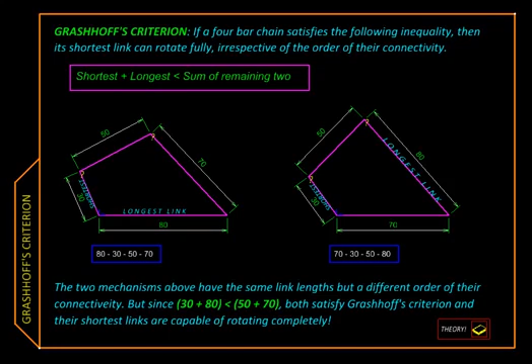Now, why are we so concerned about having a link that completely rotates? Because such a link can then be connected to an electric motor, or in olden days say a steam engine or an internal combustion engine, and the whole mechanism can then be driven automatically.

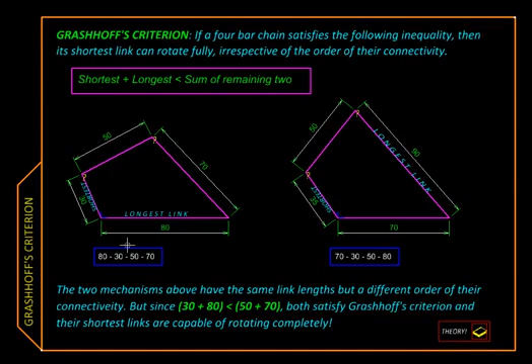The condition we are going to study is called Grashof's criterion. It says if the sum of the shortest and the longest link lengths is less than the sum of the remaining 2 link lengths, then we should have a crank in our 4-bar mechanism. Here is one such mechanism. Let us test it.

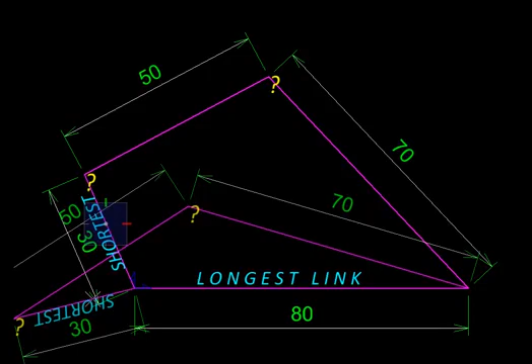So the shortest link and the longest link add up to 30 plus 80 equal to 110, and the other 2 links 50 plus 70 add up to 120. So Grashof's criterion says we should have a crank here. So let's test by actually dragging on one of the links here, the shortest link, and indeed it is capable

of complete rotation. It is not even necessary that the shortest and the longest link should be one next to the other as over here. We can as well have them on opposite sides. So if the link lengths satisfy Grashof's criterion, we will have a crank.

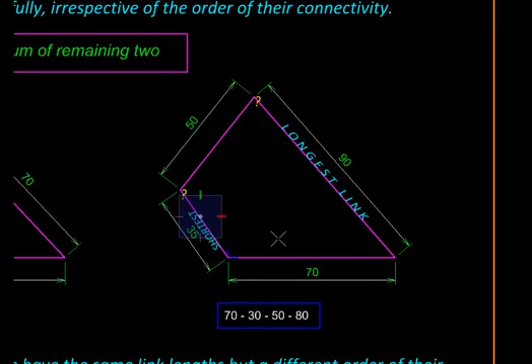Now here we are not getting a crank. Why could that be? Let's see. 35 and 90 add up to 125, while 50 plus 70 is only 120. So Grashof's criterion is violated. So the mechanism gets locked in this position or that position, and it can't move.

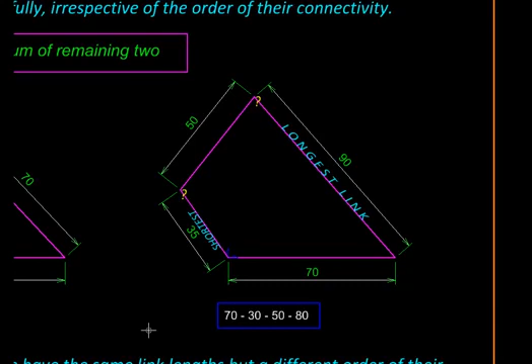So let us change the link lengths. So I will change this to 30 and this to 80 and retest it. And there we go. Now we have a crank again.

Here is an interesting question for you. Do you think for Grashof's criterion to hold good, the smallest link should be free to move like this? Or could the longer link become a crank? You can pause the video now and think about it, because next we are going to fix the smallest link and do this experiment and find out.

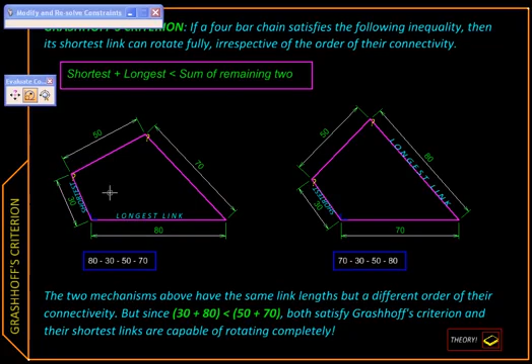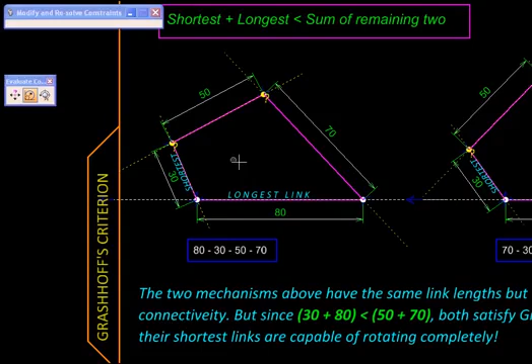Okay, so let us zoom to this mechanism here. I'm going to turn on the construction so you can see its bare bones underneath. Then I'm going to release this link so its direction is no more fixed, and we will fix the direction of our smallest link. So it is fixed at this point and this direction is fixed.

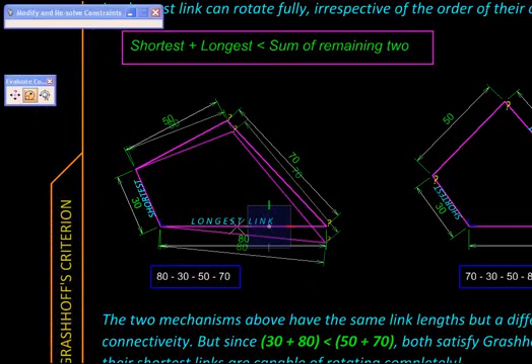Let's hide the construction and try to drag on the longest link. And there we go. It still rotates completely. So Grashof's criterion is independent of which link is fixed.